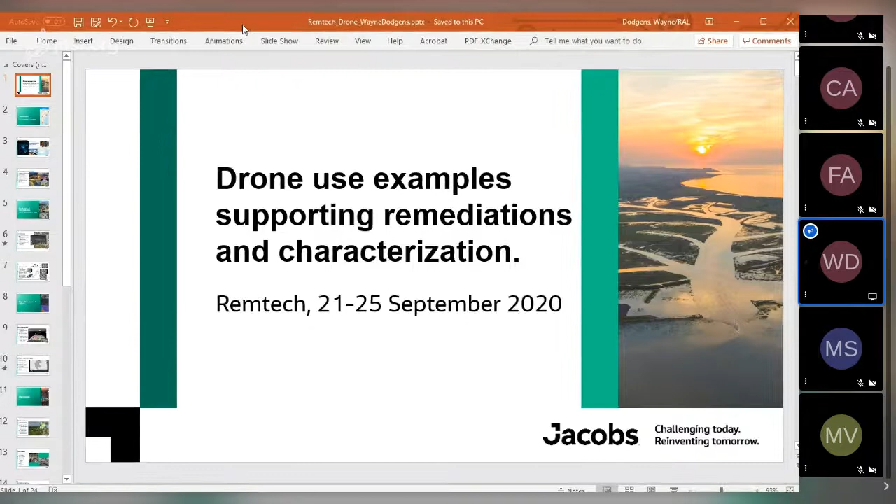First, I want to talk a little bit about our drone initiative. We have about 60 pilots total, and they're spread out. We've got about 50 or so in North America, 5 in the Asia Pacific area, and 3 or so in the UK that serve different parts of Europe. I'm not aware of any Italian drone pilots that we have, but that doesn't mean they're not out there just because I don't know about them. So that's one of my challenges, is to get a handle on exactly how many folks we have.

So this technology, as you all know, can be used for a lot of different things. It's a really quite a broad tool that can be applied in just so many different ways, and we're still discovering new ways all the time.

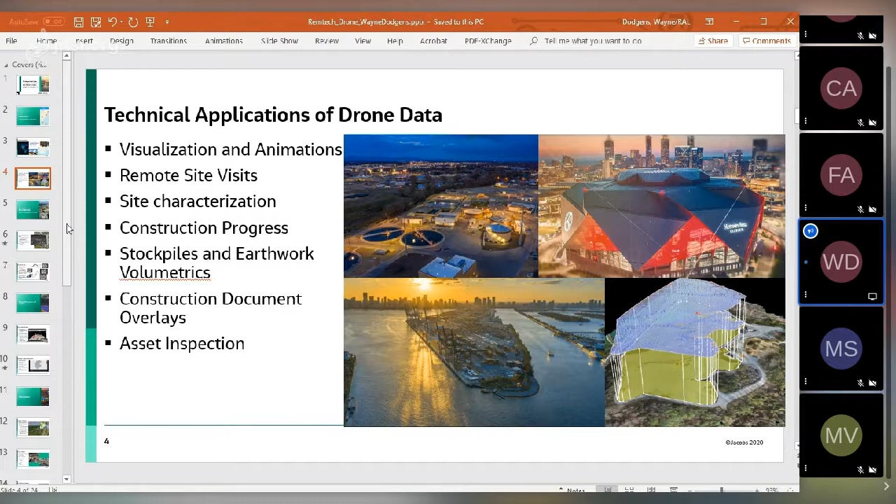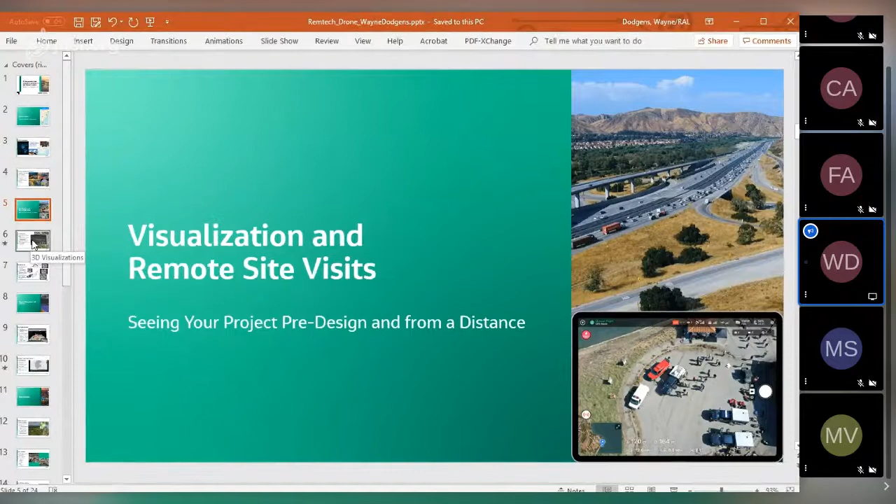So, unfortunately, I have to be in this windowed environment, but there are some nice animations in this slide deck that I guess we won't see because I'm worried my screen resolution won't be compatible with everyone. But one of the things that with COVID we're finding is really helpful is the ability to do remote site visits. And so we have the capabilities to visualize the data and make 3D visualizations.

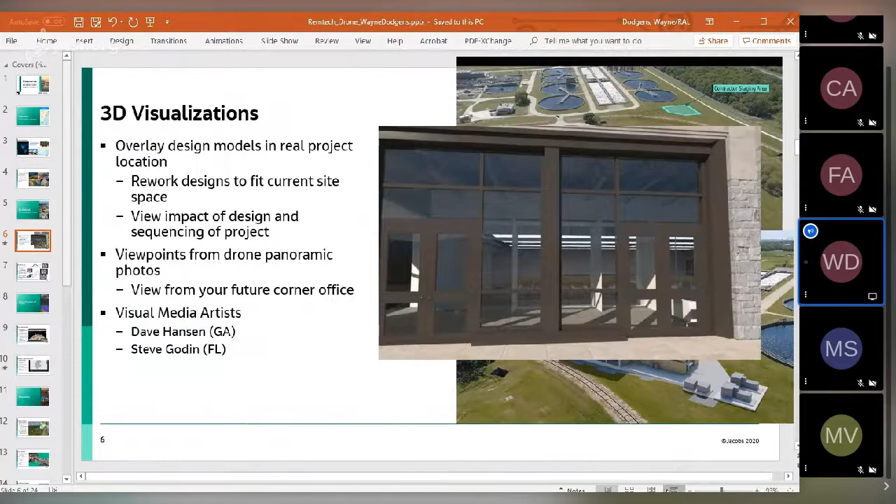Let's see, I've got some animations in this that I'd like to show. So let's see if we can get this to work. Can you let me know, does that work for y'all's screen, or is that a bad resolution? Yeah, it works, but it's a little bit slow. I don't know if it's slow, but yeah, I can see it. And you can read the text still? Okay, great.

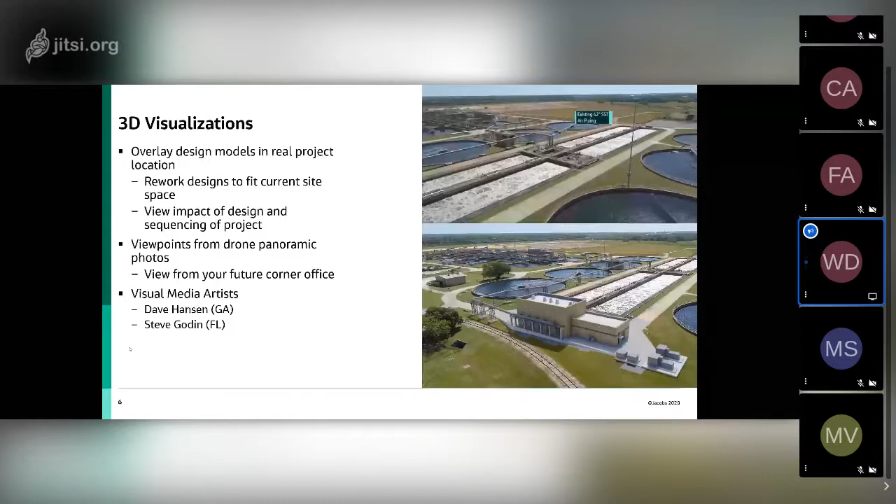So this in the top picture here is an animation that kind of shows some of the 3D visualization work that we can do, and this here as well. So this is all fabricated in 3D environments, and then allows you to see kind of what the proposed product will look like in the real environment. I believe in this example that's shown right now, there's this facade that they're showing, and then that building that you see in the distance there is a real building. So you get an idea of what the view is from up on this proposed balcony.

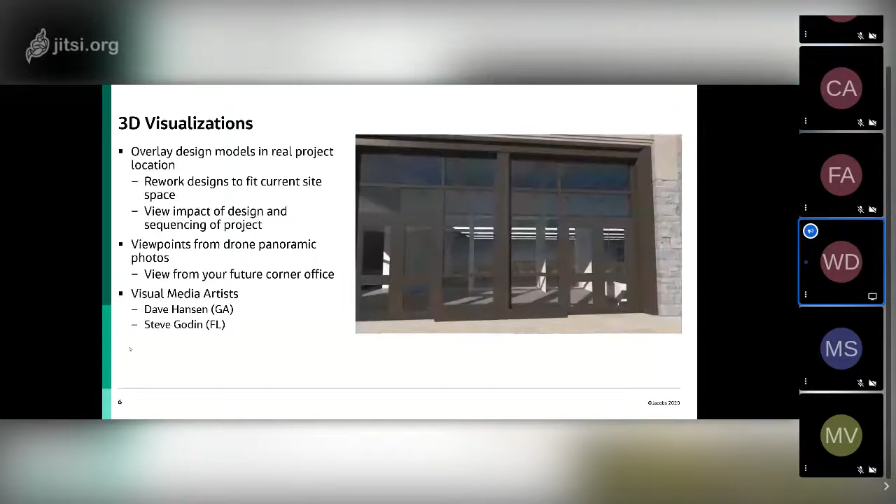But that was done by flying a drone to this elevation and taking the real life picture and then superimposing the 3D environment on top of the drone imagery. So a really neat application there.

A new emerging technology that's really been great for the COVID situation is the ability to take a drone out and fly it at an area. That's kind of what's being shown on the left of this graphic.

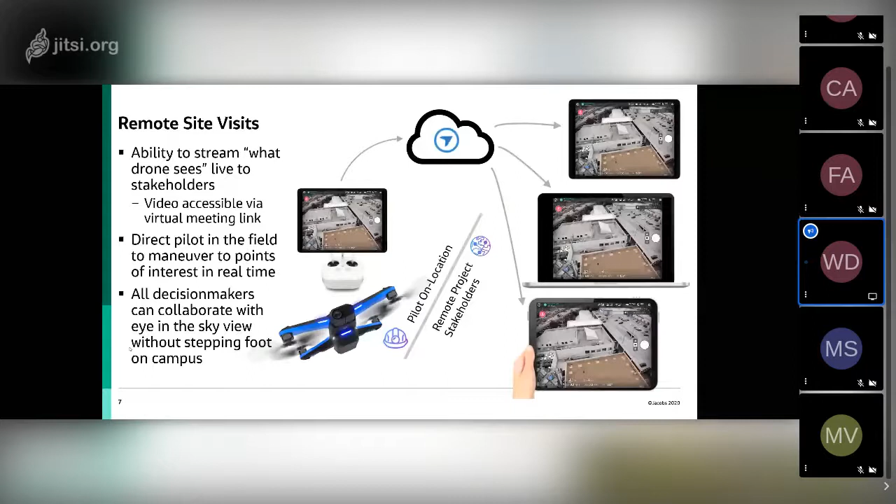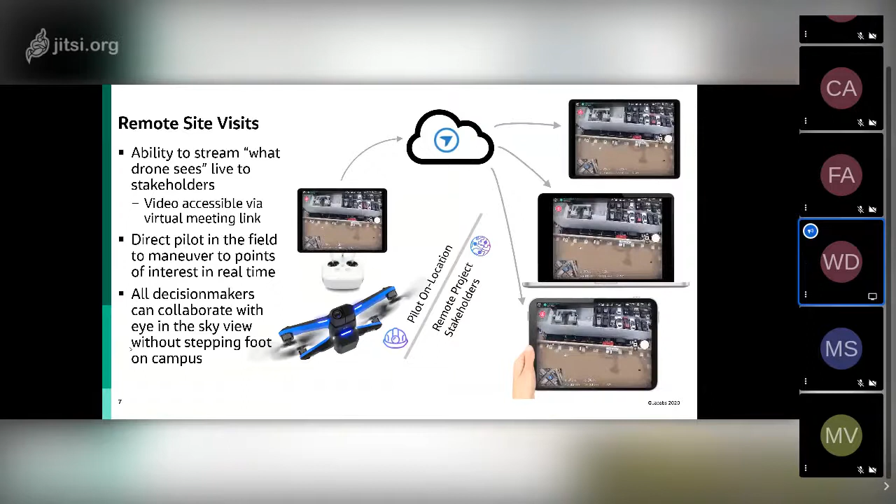The pilot is streaming out to the internet to all the other users, your remote project stakeholders back in the office, and they're able to see exactly what that drone pilot is seeing live. If you have someone else there able to communicate with the drone pilot, you can say, fly closer to this corner of the building so I can see this roof, or go show me underneath what it looks like. It's a really nice tool for not having to send stakeholders to the site in this time of low travel.

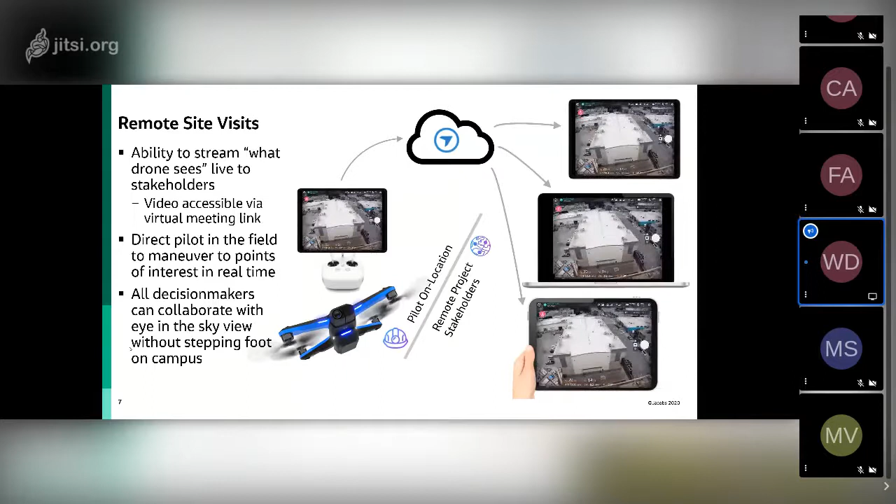You only have to send one person out, and then you can have, in theory, unlimited folks viewing what that drone operator is seeing. So it's really a nice collaboration tool, and it helps get people quote unquote on the site without actually having to go there. It's a really nice tool.

So we're using drones in process management, and there's a lot of analytical tools helping us do that. Drone Deploy is one of our softwares that provides a cloud-based platform in a secure environment. We fly the drone, collect the imagery and video, and upload it to this cloud environment so anyone can access it from anywhere. We don't have to be all in the same office or co-located. Everybody can get access to that imagery and analysis right away as soon as it's uploaded and processed.

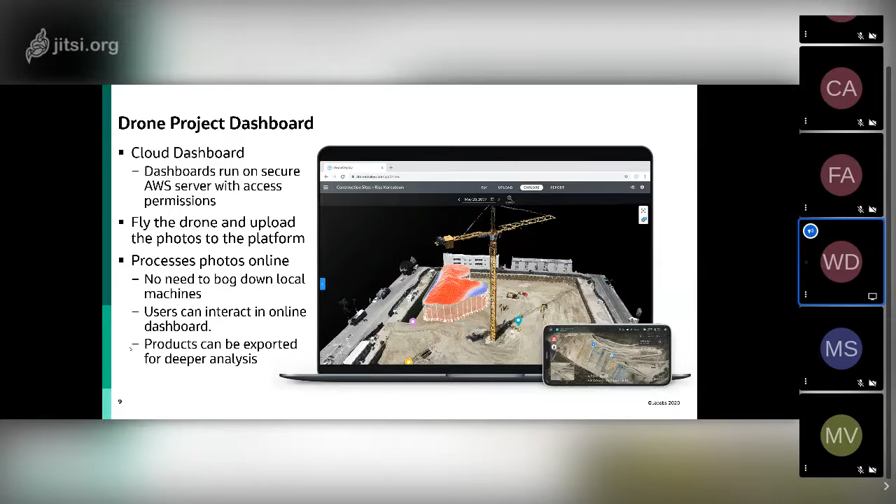One of the real keys here is that these processing times are now turned around in a matter of hours, or a day if there's a lot, versus weeks possibly if it's a traditional survey. We'll talk about that more a little later.

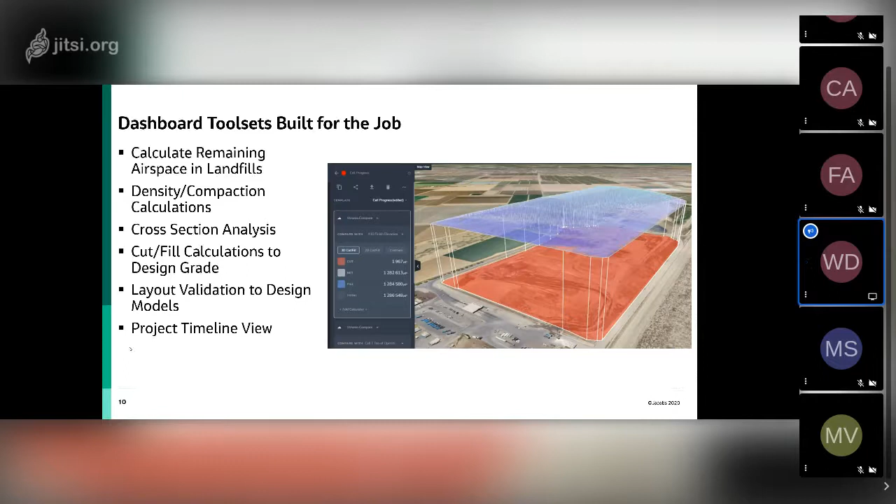Another one of our tools has a lot of capabilities focused more on earthworks type of stuff, but there are other applications in the remediation space we haven't explored yet. So we're going to go through a couple of examples where we're looking at landfills and things like that, talking about densities and cross sections.

In this example, we have this yellow solid line that represents the terrain as it is now, and then a dotted line that rises above that in elevation. That's a visualization of the maximum height this landfill is permitted to reach. So we can calculate the volume in that headspace, so to speak, of how much more room they have to grow before they run into their permit issues.

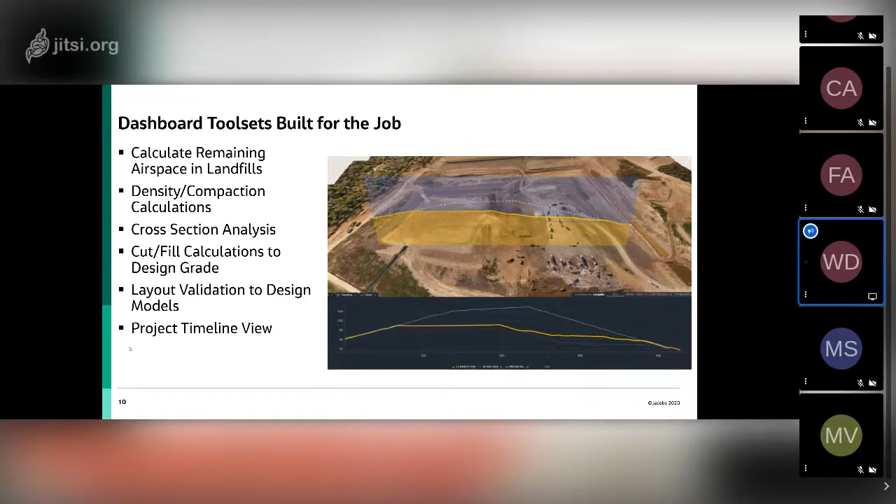We can go out and calculate these types of things in a matter of hours versus sending out a survey crew, which may take a couple of days. This is an example of a volume comparison where red is where we've gone too high and blue is where we've gone too low—you can change these colors, of course. It's kind of an analysis of what needs to be cut and what needs to be filled still.

This is a GIF—I know it's really fast, so it's not the best GIF, but it shows the ability to take imagery and overlay your plan. We can overlay the CAD line work onto the imagery we take, and we can overlay ArcGIS shapefiles and those types of data over the imagery we go out and collect.

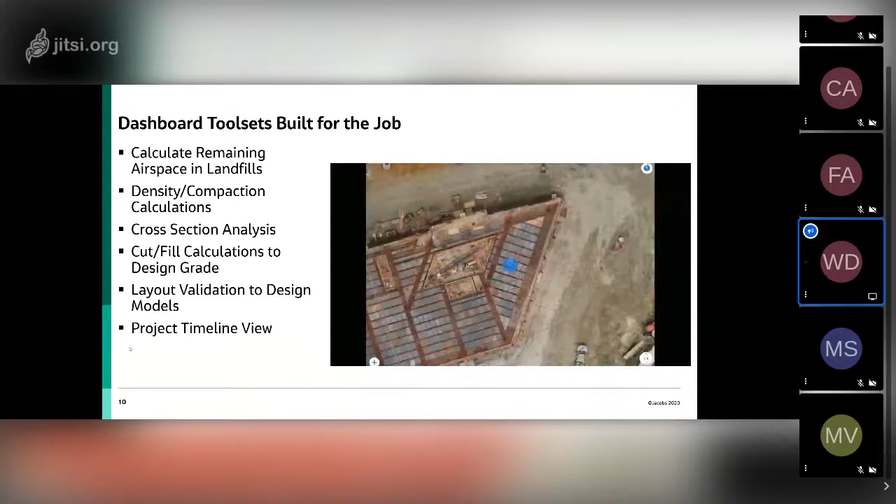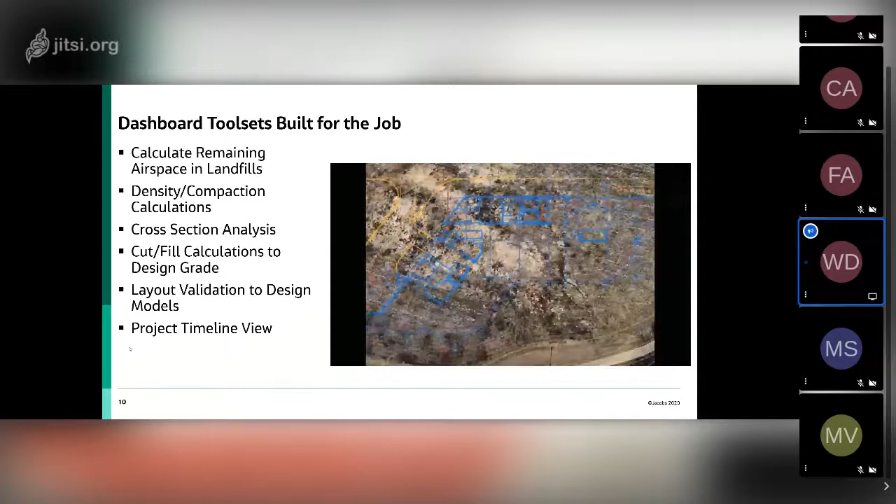It's a great way to be able to field verify what is happening. Is it happening to design spec? Is it happening in the right timelines? It's a great tool for confirming things are happening on the ground like you expect.

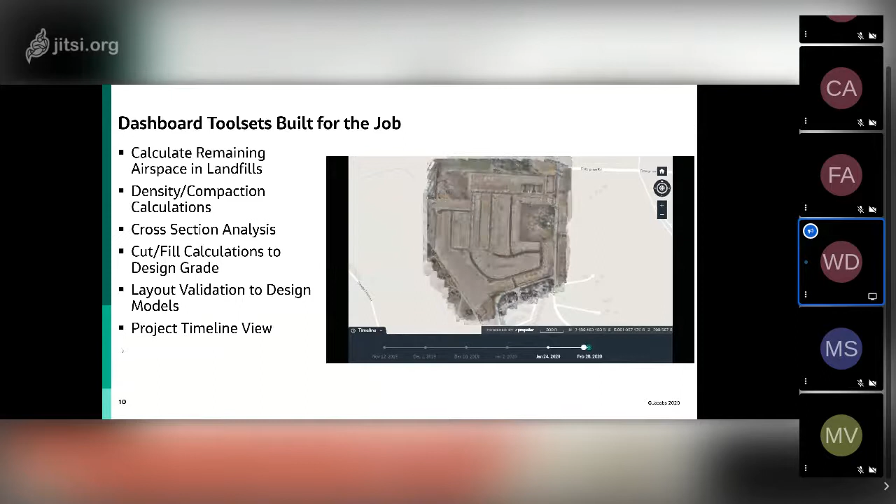This GIF shows how the project has progressed over time. By flying this site multiple times over a period, this looks like it's going from November 2019 to February 28th, 2020, over six different flights. You get a nice progression of the site, seeing how it goes from barren land to a built-up environment. So we have these tools available to show and share with other folks.

Project examples. I'll go through a few project examples here. I pulled out a few that I think would be hopefully relevant to this crowd.

We did a site where we needed to delineate wetlands. This slide highlights how we saved a lot of time versus a traditional survey. Traditionally, they would send out 2 people for 4 weeks to be out in the field for 2 weeks. Then it would take them another three quarters of a week to turn the maps around. And then they would do another week of field verification, based on their surveying out in the field.

With the drone and the UAS, we're able to send 2 people out there for a week, and they are able to fly it in 2 days. They run it back in the office for 2 days, and then they still have 1 day of field verification. But they're able to turn the entire product around in 1 week versus the 4 weeks total time. This is for a 600-acre site, and the flying part of it was only 12 hours total in the air for 600 acres.

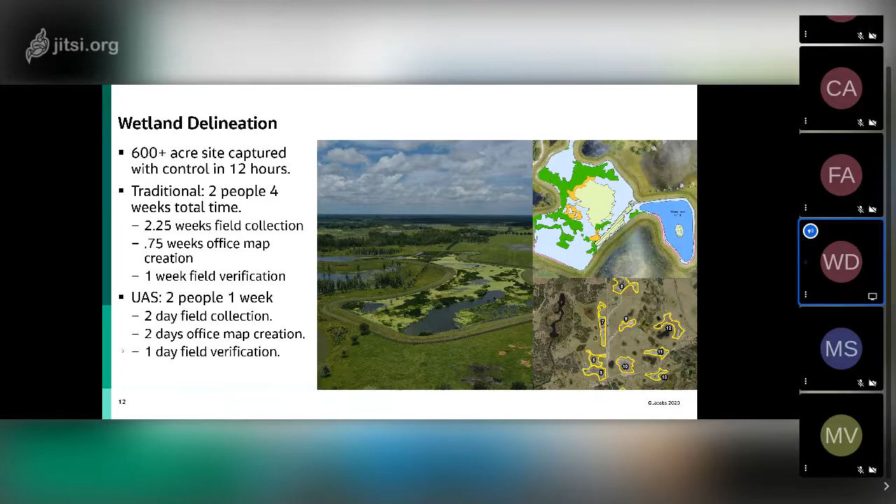This was a 30-acre site. We had 1 day of access to get in there and show them exactly what we could show them, so we turned this around real quick. It turned out really well. They were super happy with all this because they weren't able to see from the roadside how these cliffs are eroding in and under. They had some idea from overhead shots, but they hadn't been able to get out and look from the sea toward the land with good precision and accuracy to get measurements.

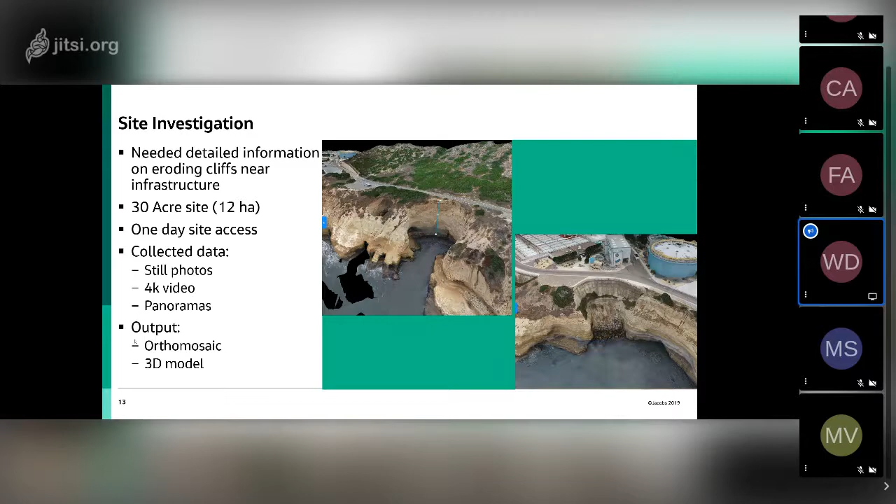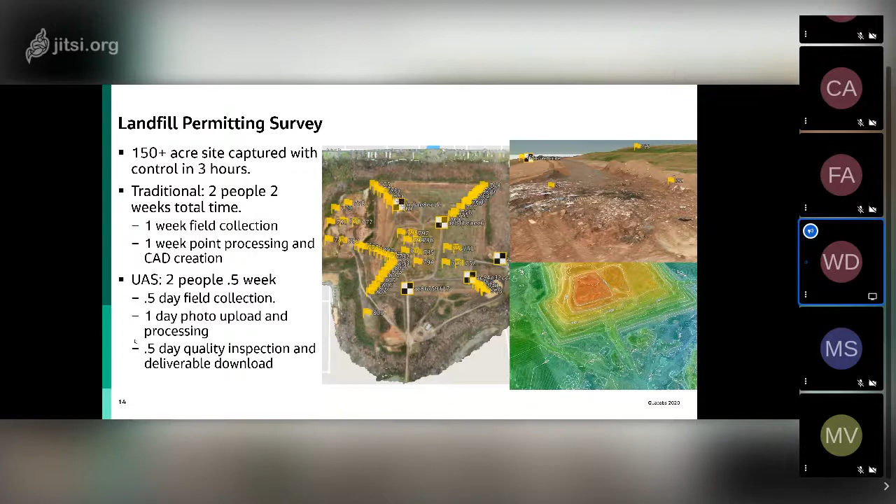I know this slide's a little busy, but this is another landfill permitting survey that we did, and this was kind of a test of how drone imagery would compare to a traditional survey. So we had a traditional survey out there - all these little yellow flags are the survey points they took as part of their traditional survey, taking a bunch of different points to get an idea of what the landfill hill was like.

We took the drone out and were able to fly the entire site. The thing we were able to demonstrate with the drone is that we can model the entire area, not only those areas that are surveyed in.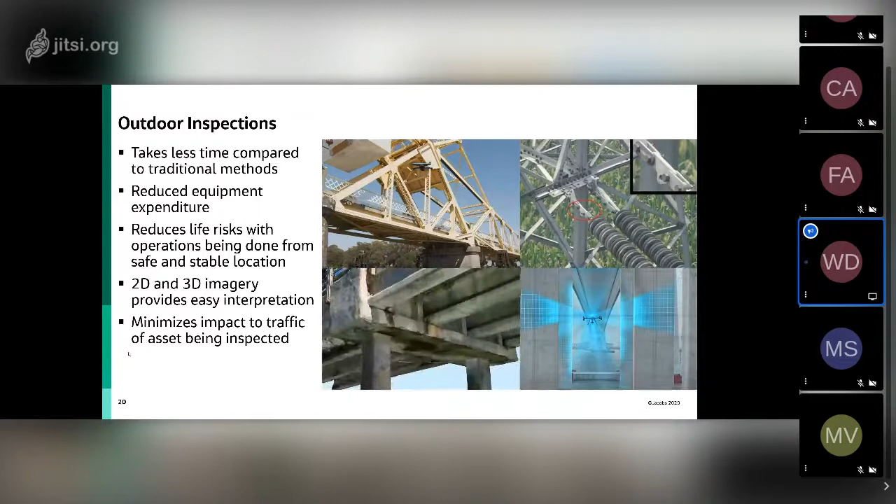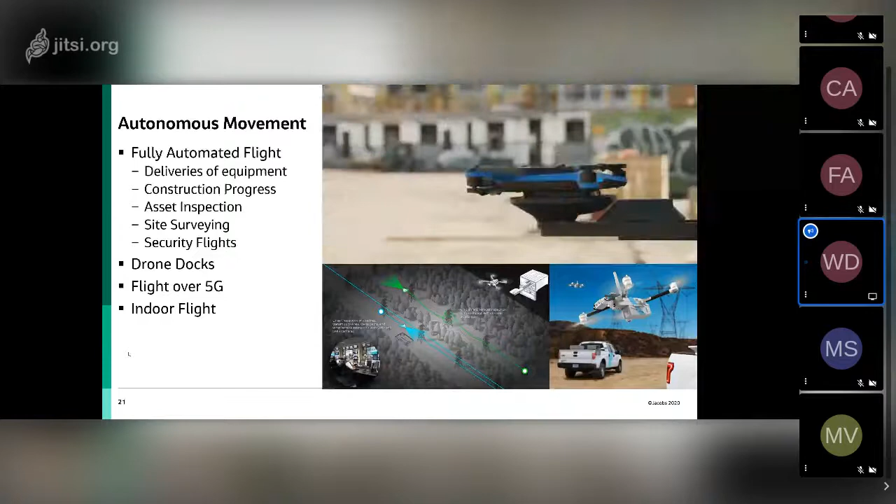So this is a nice little high-tech concept that exists. We're just waiting on the regulations to catch up to allow us to make use of this. It's basically the drone-in-a-box concept. The idea is that every site, whether it's construction, remediation, or anything we want to keep tabs on, the box sits on site. The drone is autonomous, it goes out and flies a set pattern daily, weekly, or monthly, however often, because there's no pilot needed. The technology is ready for this; the regulatory compliance just needs to catch up, and we'll be there.

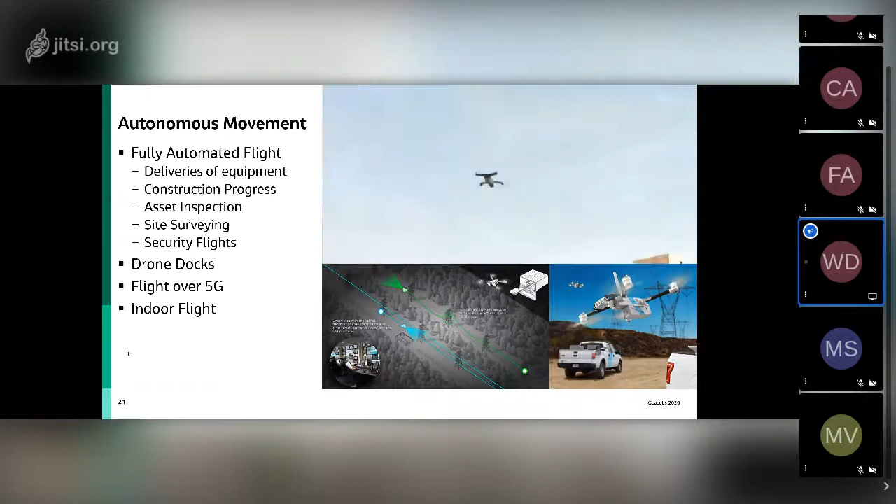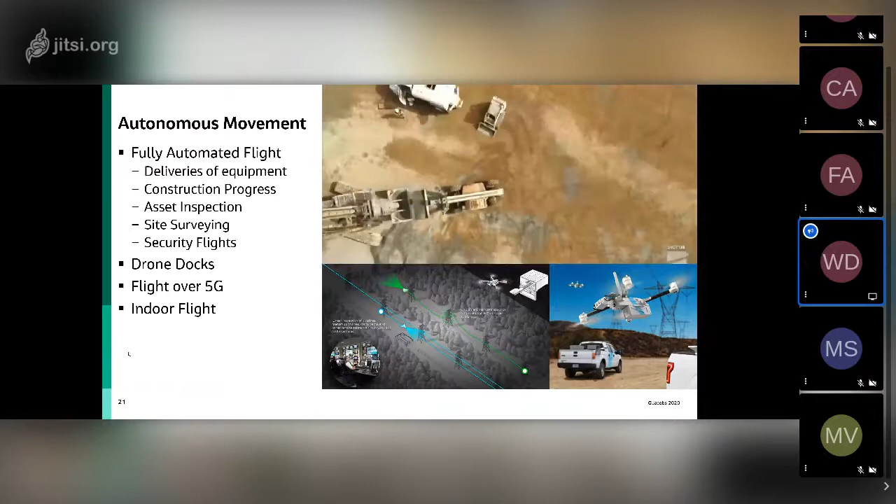Other technology we're looking forward to is the rollout of 5G networks. They're going to allow us, hopefully, to fly beyond visual line of sight. Right now you have to have a pilot that can keep their eyes on the drone at all times, in the US at least. We're hoping that will change as the regulatory environment catches up, and the technology with 5G is hopefully going to allow us to do that. So lots of exciting things coming up.

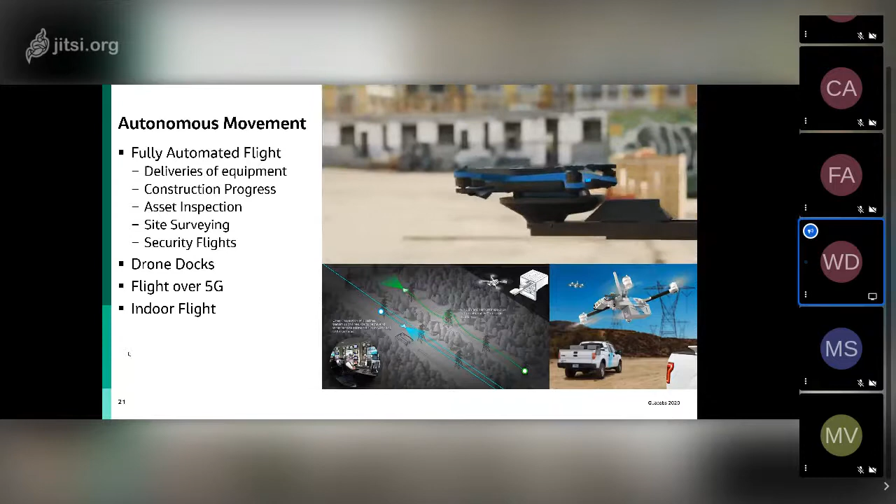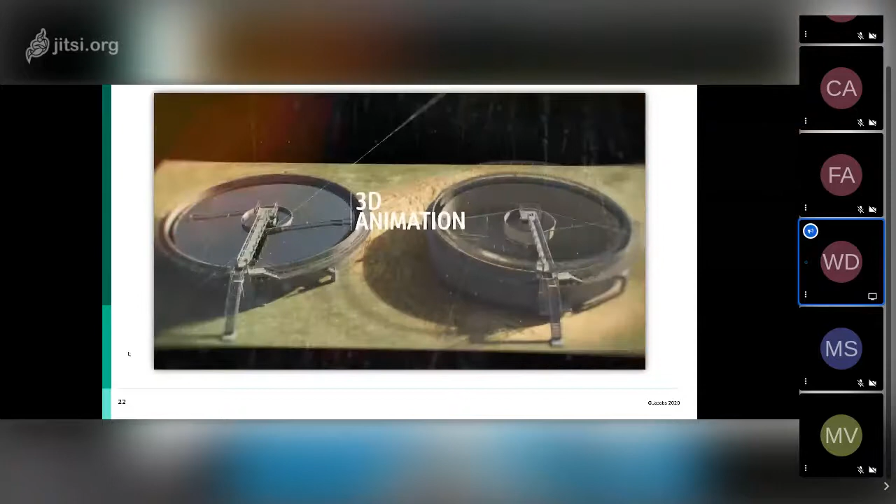This is just a quick video a coworker put together that shows some of the 3D animation work we've done.

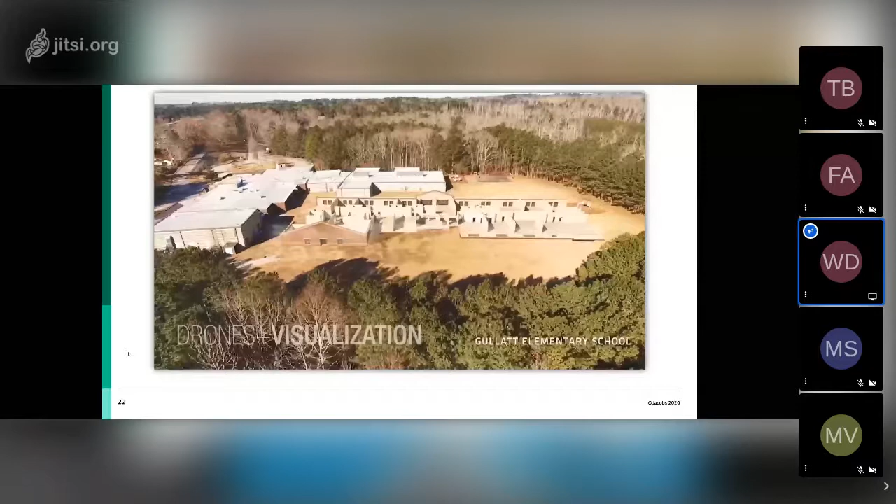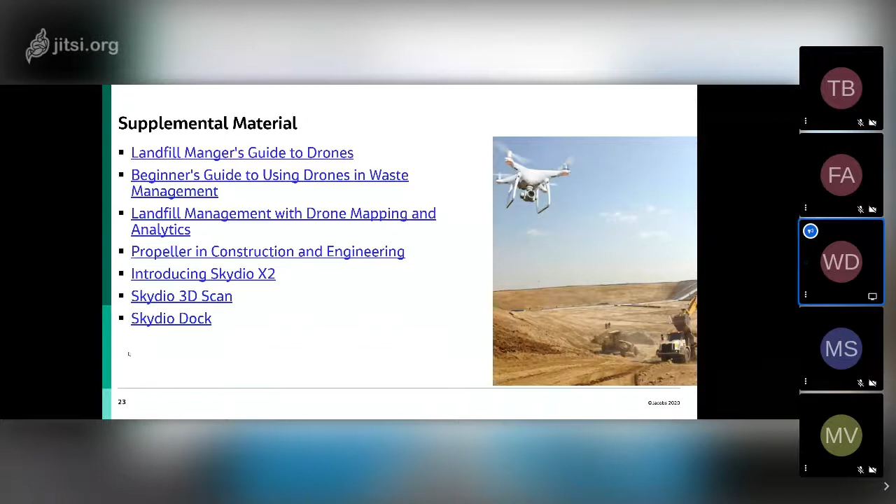Okay, hopefully that came through. A lot of what you're seeing in that video is drone imagery and 3D modeling overlaid over it. So a lot of those things where the roadways kind of appear out of nowhere, that was that type of work. I think we had slated 30 minutes for this, and we're right there with that. I think I covered everything I wanted to cover.

Thank you, Wayne. I have a couple of questions. One is, if we would like to implement these technologies, for example here in Europe, do we own those drones, or do we sub-contract to pilots? Is there some requirement the drones must have to conduct certain activities or surveys, or are the drones owned by Jacobs?

Right, so to answer your question, this of course is with the United States lens because that's where I'm most familiar, but I believe this will be true in most countries—do your own local research, of course. In order to operate commercially, you have to go through a separate certification process and meet the requirements of your civil aviation authority. We have our pilots in the U.S. that have done that. And to answer your question about owning the drones, yes, in the United States we own several drones, and we have those fully insured under our policy.